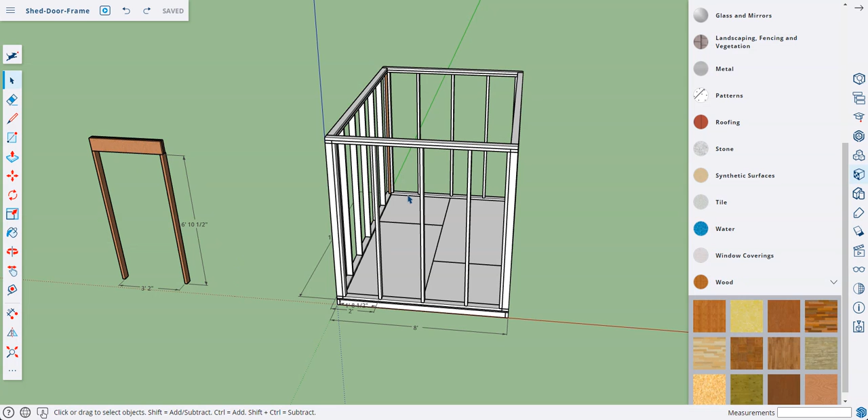All right, so we're now going to put our door frame in the middle of this wall. We're going to select this and move it to find the middle of this group. So somewhere here is the middle. There you go, midpoint. We're going to put it at the midpoint of this.

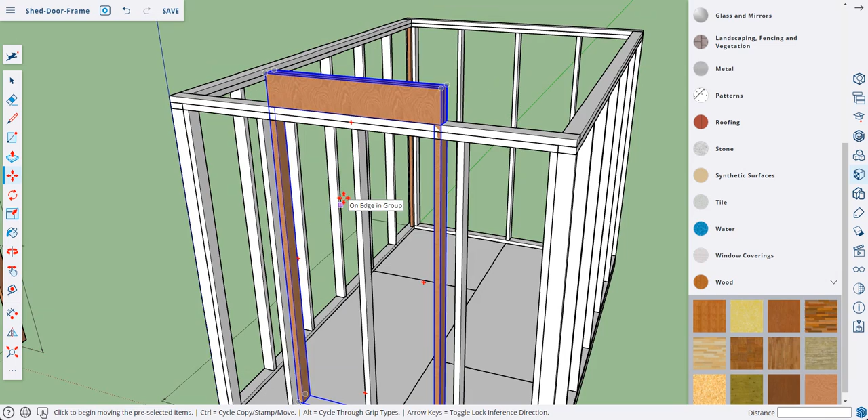We're going to put it in the midpoint of this top double plate. There you go. Once we put it in the middle, we're going to now move it down until it touches the floor. Okay, it's going to touch the floor. There you go.

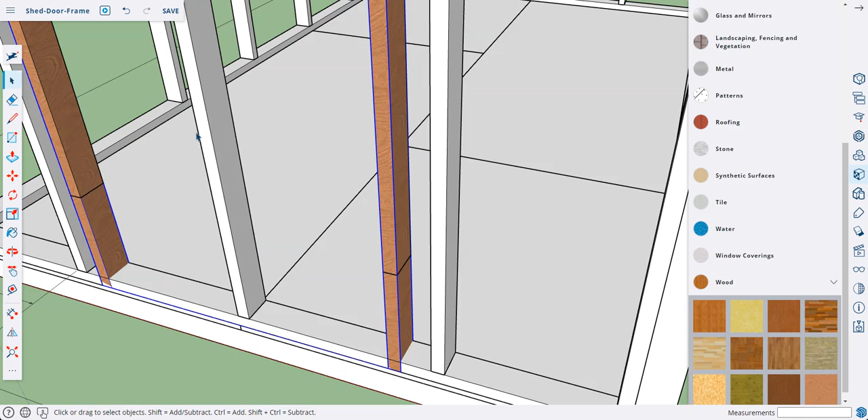Then just simply press escape or click your arrow tool. Let's make sure we didn't make extra copies. Sometimes it happens. Oh yeah, we did make extra. So simply select that and press delete. I think we also made an extra copy here, so select that and press delete.

Okay, we don't need this anymore. All right, we're gonna just erase it.

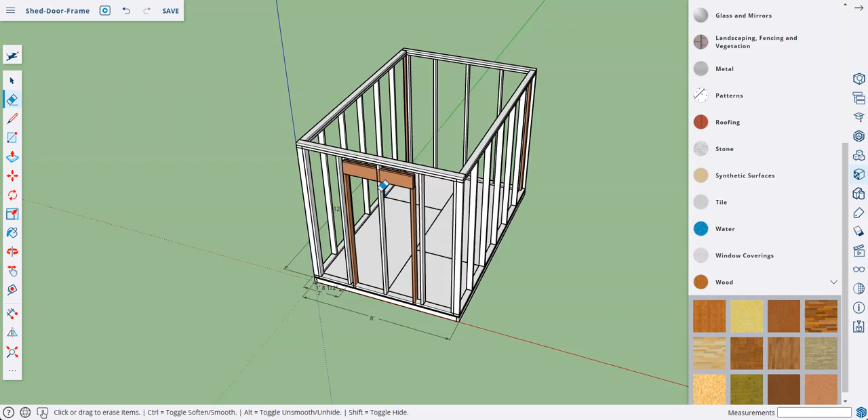Okay, so now the door frame has this rough opening, and what you need to do is cut this stud here, and then this small stud will become what we call a cripple stud.

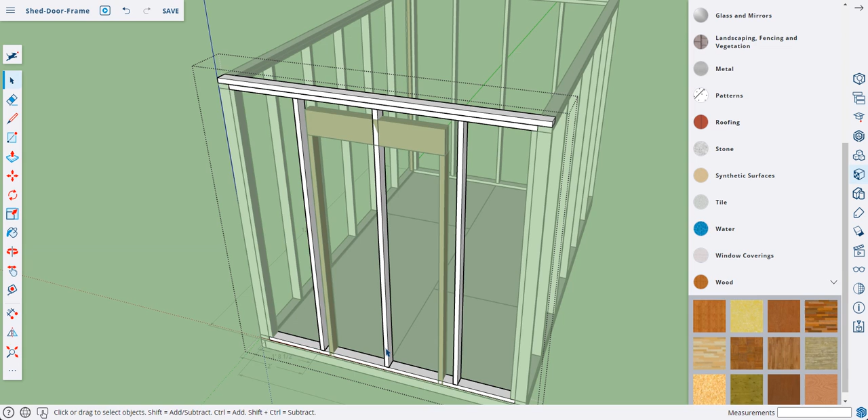So we're going to double click this, and we are going to move this first. It's hard to cut from the bottom, so we're going to just move that from one corner all the way up, on the blue axis, until it touches the top of the header.

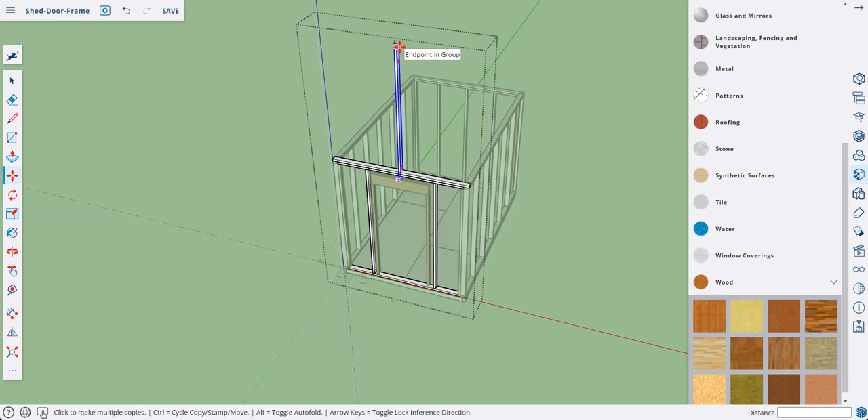Once we have that moved up, let's zoom in. We can now edit this group, right click and edit the group, and then use the push pull tool and pull this down until we touch the bottom of this plate. There you go, so that becomes our cripple stud.

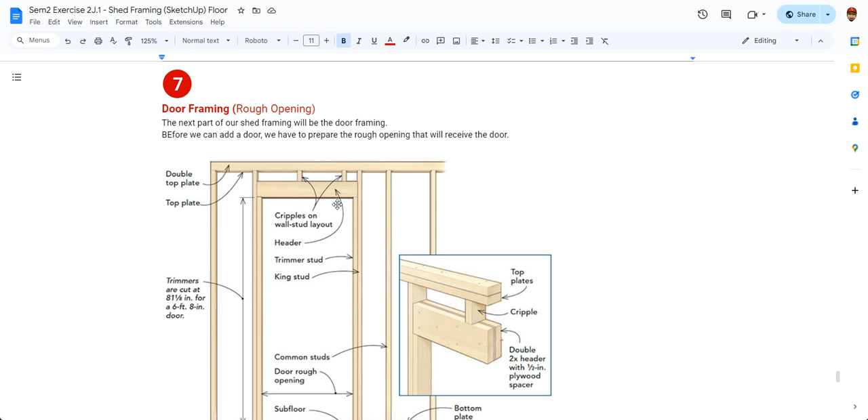A cripple stud is basically a small stud on top of a header. Okay, so that's what we did. The next thing we're going to do, after right clicking to close the group, is add what we call the king studs. The king studs are studs added beside what we call the jack stud. So these two pieces are what we call the trimmer stud or the jack stud.

And we're going to add another stud here. So we're going to simply edit the door frame, double click, and make a copy of this. We're going to make a copy, press Control, simply make a copy. There you go, and then edit that copy.

Edit the group, just push pull and pull that up until it hits the bottom of the top plate. So that's our king stud.

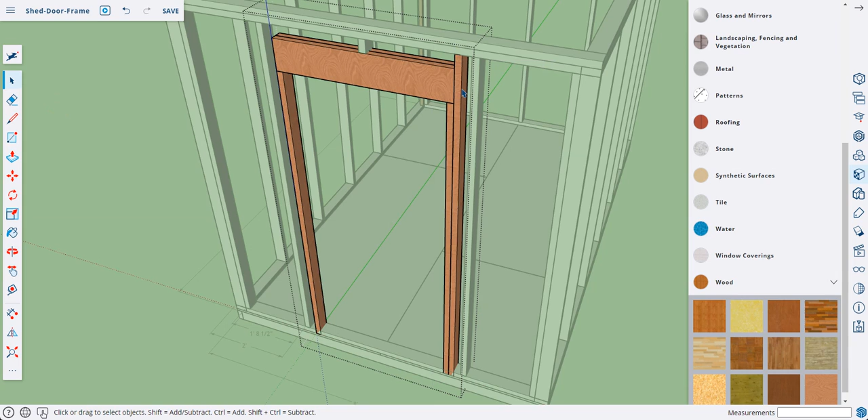And then we're going to simply copy that on this side. So we're going to close the group and copy this on this side. We can just use our mirror tool and then drag the red one to the middle of this group here, and it will make a copy here. Oh, we didn't press Control. There you go, press Control. And then simply click this and we're done.

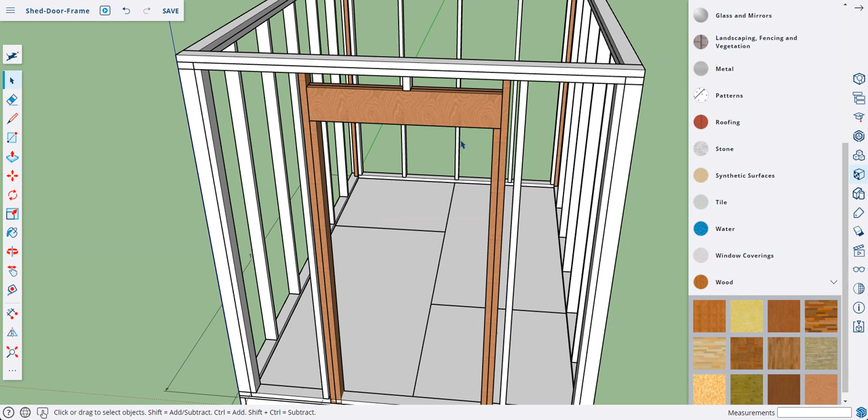So the two studs that we've added on each side of the header are called the king studs. The two studs below the header are called the trimmer or jack studs, and the small stud on top of the header is called the cripple stud.

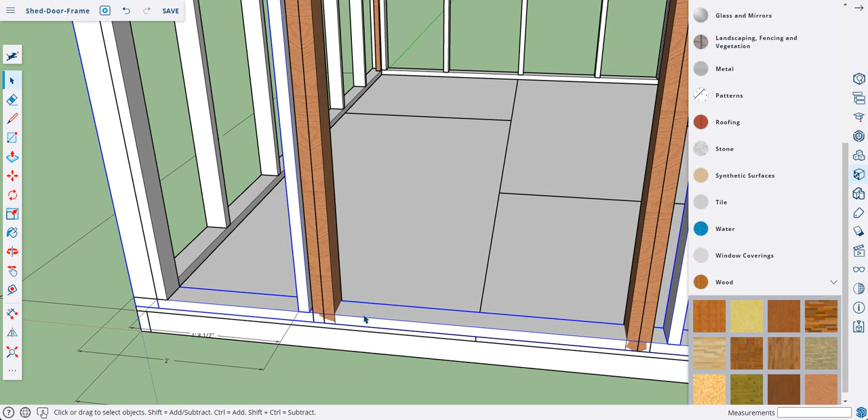The last piece that we need to do is simply cut this piece of wood here, or cut the opening in this bottom plate here. So we can simply double click this group, double click, and we can cut this by moving it into pieces.

So we're gonna simply move it again. We're going to move until it touches this face over here. We can move it there.

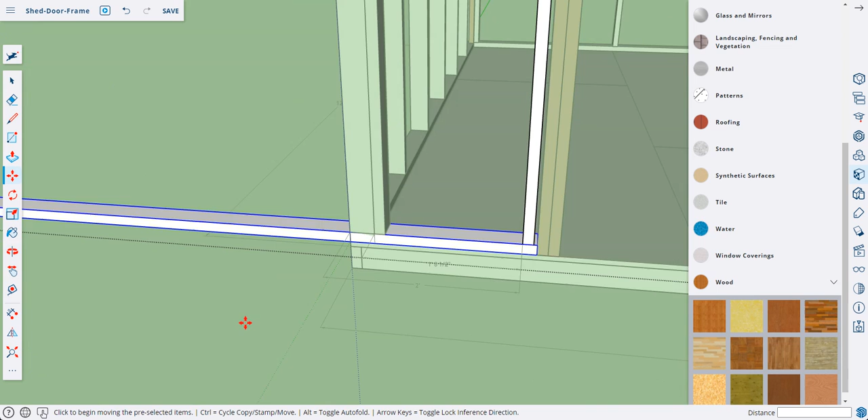And then from the other end here, we can do an edit and push pull, pulling this end until it is over here. Okay, and then right click and close the group.

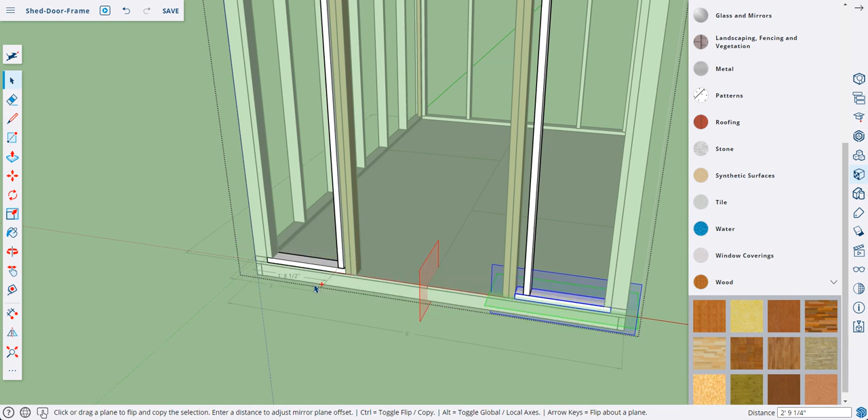We're going to mirror this, so we're going to select that piece, use the flip tool, and drag this red point to this point here in the middle. Then press Control to make a copy. Right click and close the group, and there you go.

We have added the door frame to our front wall, to receive a 36 by 80 inch door.